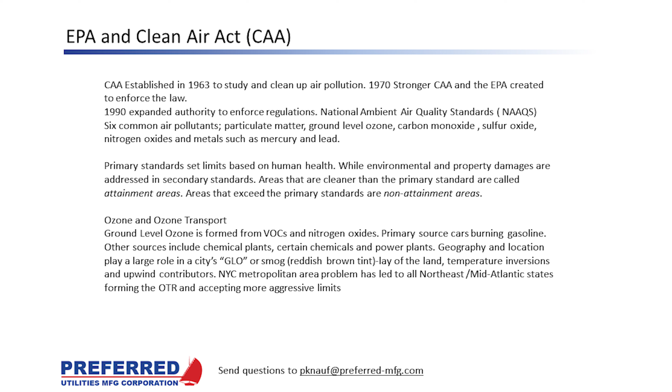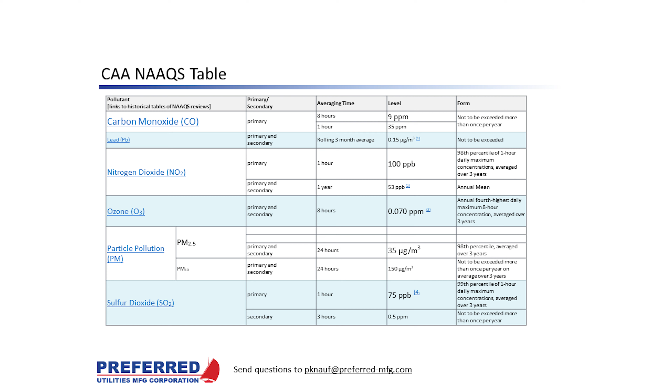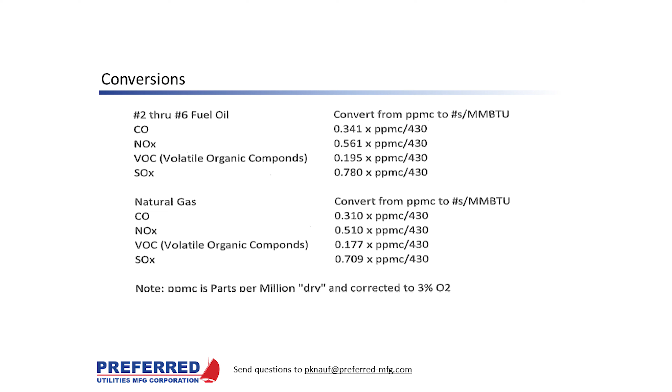If you ever notice a spec or documentation, quite often it's expressed in pounds per million BTU. This is the way you convert from parts per million to pounds per million BTUs for the various fuels, as well as for the chemicals and pollutants we're discussing today. This is a handy chart to print out and save.

Surveys show that the public perception is we are emitting more today and air is getting much worse. Despite this overwhelming perception, the U.S. is doing quite well, and the developing nations are actually contributing to most of the world's pollution.

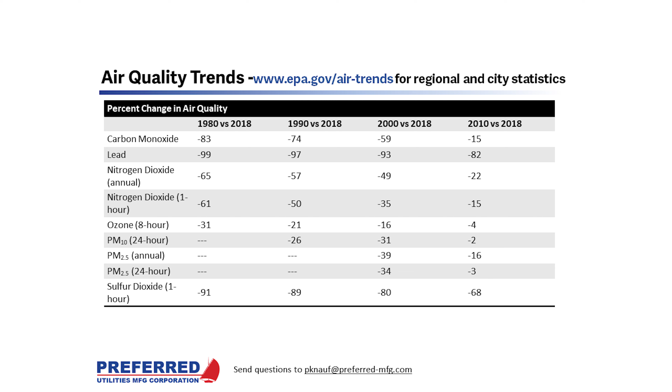They didn't collect particulate matter data back then, not until 2000. Sulfur dioxide emissions are down by 91%.

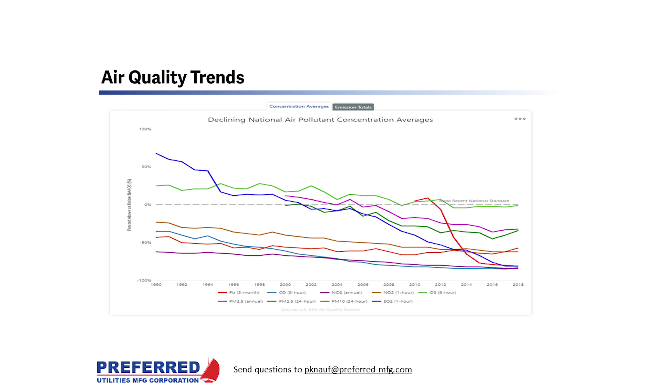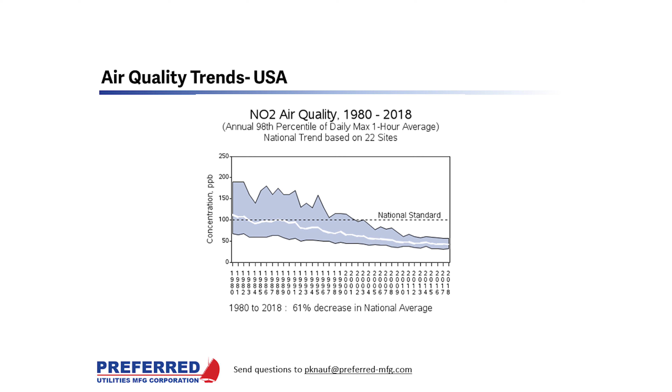The U.S. NO2 air quality from 1980 to 2018: as you can see, we were above what is now the national standard of 100 early on, but by the early 2000s we dropped below that standard, and today we're quite a bit below it. That's measured as daily max 1 hour averages.

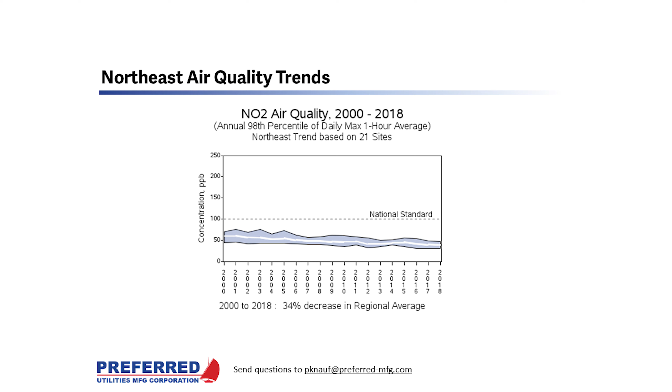There are three main ways to reduce emissions: pre-combustion choices, combustion methods, and post-combustion methods. We're going to discuss those separately.

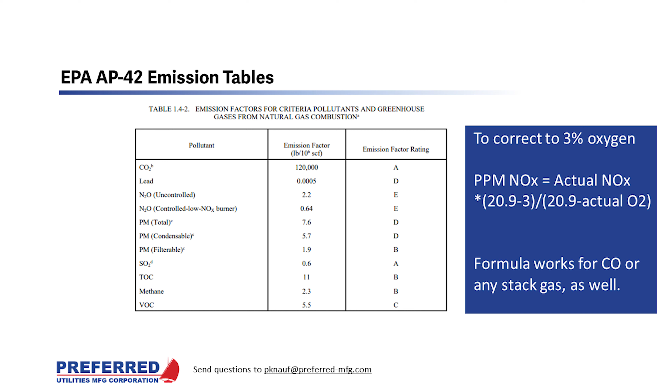It's important to note that combustion has pass-through components. Pollution from sulfur, lead, mercury, and particulate matter are not influenced by combustion technology; they're in the fuel and pass through the combustion process.

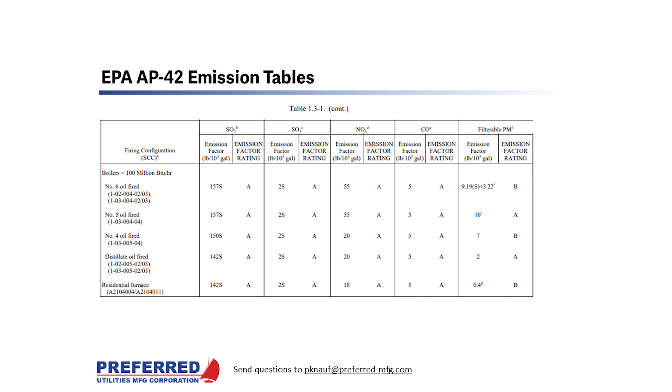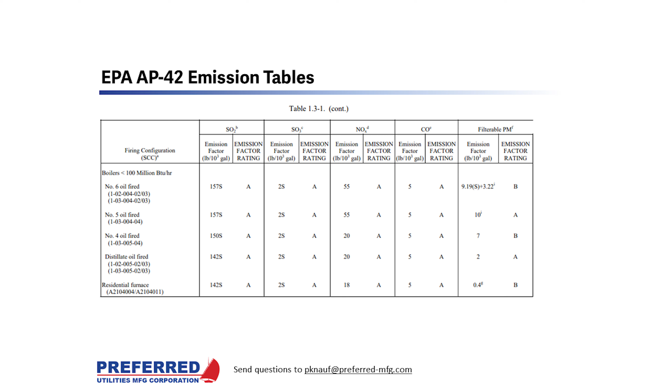Table 1.3.1 shows various fuel oil emissions, expected emissions for SOx, NOx, and CO for different size types of fuel oils. It's important to see the differences in residential furnace emissions compared to the previous slide on natural gas emissions. So far we've discussed pre-combustion techniques to reduce emissions, mainly fuel selection.

Next, we'll talk about operational changes, but I want to take this time to point out the EPA website and the wealth of information available there. Earlier you saw air trends that came right off the EPA website, and recently we saw statistics on fuel characteristics—all this and more information is available at epa.gov.

Next we're going to start talking about operational changes to reduce emissions. Obviously, things like good boiler tuning and lean excess air can improve performance and efficiency in any operation. But mainly we'll be discussing the reduction of pollutants that are not pass-through pollutants, by optimizing combustion and efficiency through improving the combustion process.

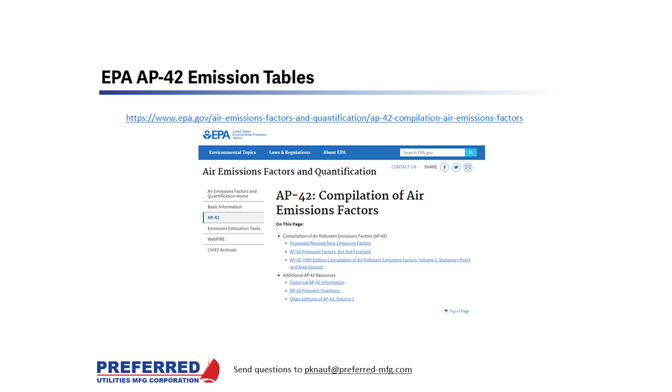Focusing on NOx emissions, NOx is usually 97% nitric oxide and 3% nitrogen dioxide, but it is formed in three distinct ways: fuel NOx, thermal NOx, and prompt NOx. Fuel NOx is oxidation of nitrogen molecules attached to hydrocarbon chains inside the fuel. Thermal NOx is formed by disassociating nitrogen molecules in the air that join with oxygen to form nitric oxide—two distinct different sources for the nitrogen. Finally, prompt NOx is formed from the rapid reaction of atmospheric nitrogen with hydrocarbon radicals.

I wanted to insert here where we've seen pollutants characterized in a few different engineering units. When pollutants are characterized as parts per million, it's important to correct for the oxygen level in the stack, since that influences the statistics. You take the formula shown here: actual NOx times 20.9 minus 3, divided by 20.9 minus your actual measured oxygen. This works for CO as well as any of the other stack pollutants.

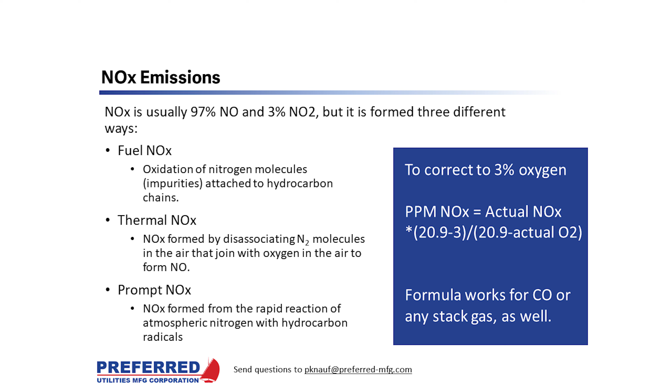Fuel NOx reduction involves oxidation of the fuel-bound nitrogen molecules attached to hydrocarbon chains. For single burner boilers, the only way to reduce it is by burning cleaner fuels. Multiple burner boilers, larger boilers, can use fuel staging techniques to reduce NOx. The strategy is to convert the hydrocarbon fuel to carbon monoxide in a sub-stoichiometric or fuel-rich environment, then convert the CO to CO2 and water vapor in a high excess air environment.

This can be done in utility boilers through burner tuning, over-fire air ports, and putting some burners out of service. Obviously, these methods are not available in a single burner boiler or furnace, and the only way to achieve that reduction is by changing the fuel.

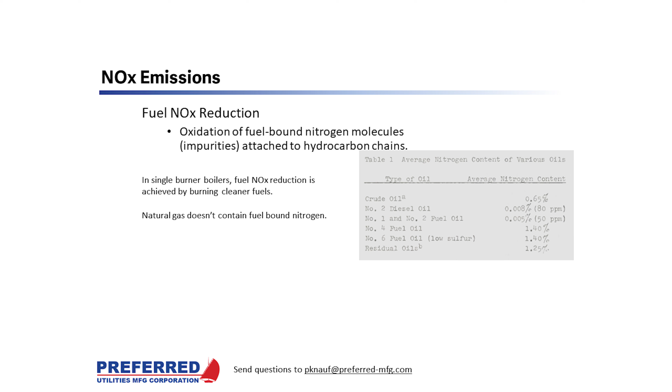Thermal NOx reduction. The disassociation of nitrogen molecules in combustion air follows an Arrhenius relationship, meaning the percentage of nitrogen molecules broken into nitrogen ions has a logarithmic relationship to temperature. So to reduce thermal NOx, combustion engineers reduce the peak temperature of the flame.

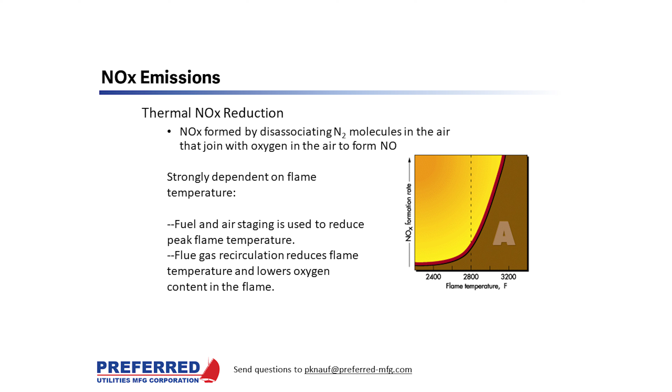This is done with burner fuel and air staging to slow combustion, and flue gas recirculation that spreads the enthalpy of combustion over a higher mass flow denominator and lowers the oxygen content at the flame, so more nitrogen radicals reform with other nitrogen radicals to make diatomic nitrogen again. Reducing the concentration of oxygen in the combustion zone, increasing the concentration of nitrogen, reducing the peak combustion temperature, and reducing the time combustion gases remain at elevated temperature will reduce thermal NOx formation.

FIR is a NOx reduction technique applicable to boilers that burn gaseous fuels only. It is similar to FGR, except that a portion of the flue gas is mixed with the fuel instead of the combustion air. Use of this technique has several advantages: it lowers the peak flame temperature, reduces the oxygen concentration in the combustion zone, improves the fuel-air mixing, and reduces the time under NOx formation conditions.

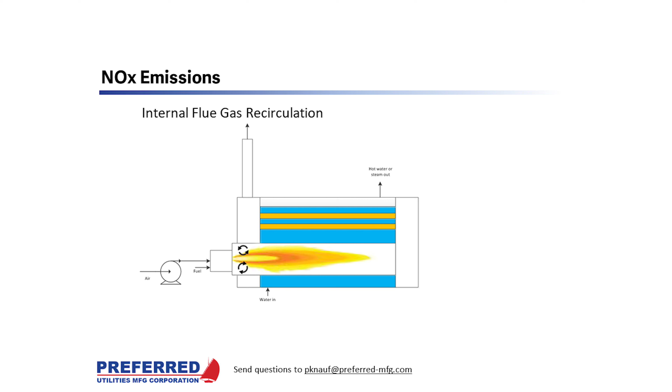When the same volume of flue gas is used, FIR can be more effective at reducing NOx than FGR. To minimize possible confusion, caution should be exercised when the acronym FIR is encountered, because it is used to represent both fuel-induced recirculation and forced internal recirculation.

This schematic shows external flue gas recirculation, which accomplishes the same type of thing by reducing the combustion temperature.

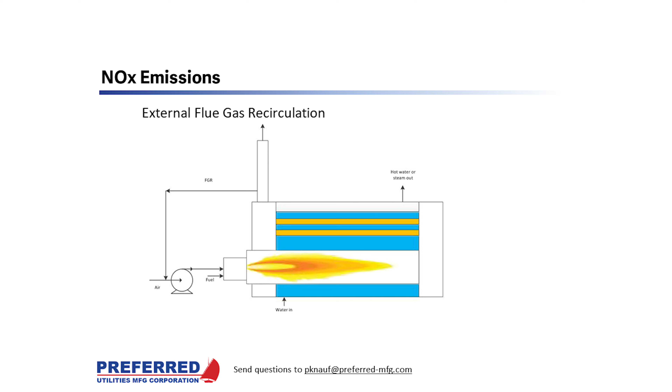It is just the external feeding of the flue gas from the stack or the last pass of the boiler back into the combustion air, where it mixes in the fan or the wind box and is reintroduced into the furnace. It is very effective against thermal NOx formation, but this technology is a little bit older, and it goes back to the 1980s.

Prompt NOx. The most effective NOx emission control strategy is one in which NOx formation is reduced as much as possible and boiler performance is affected as little as possible. Except in advanced burner concepts where air and fuel are premixed, combustion at either low or very high excess air levels results in low NOx formation. For most low NOx boilers, the best combination of low NOx formation and high boiler efficiency occurs when the amount of oxygen is just enough to ensure complete combustion.

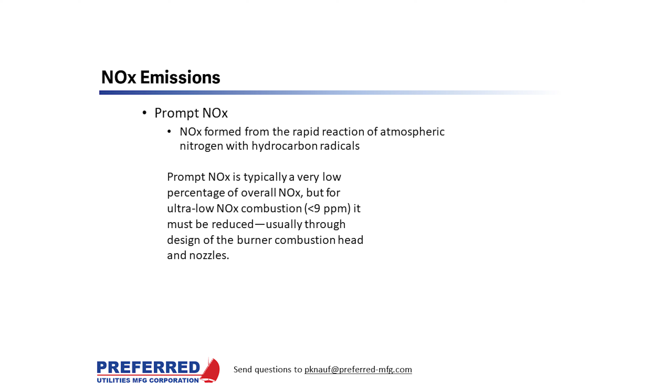Operation at very low excess air levels can cause problems. It can result in incomplete combustion and the formation of CO that causes boiler efficiency to decrease. In addition, it can create unsafe conditions inside the boiler that can lead to an explosion.

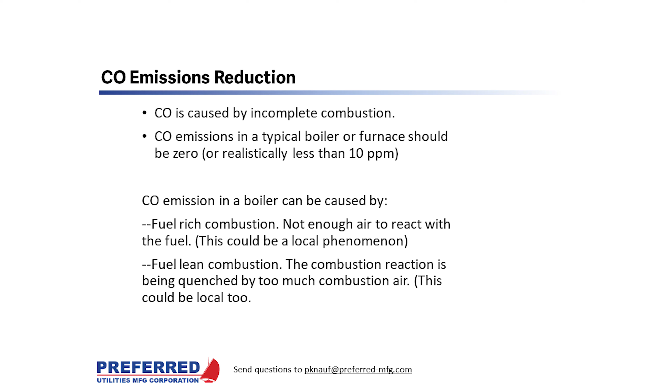CO emissions reduction. CO is caused by incomplete combustion. CO emissions in a typical boiler or furnace are realistically always less than 10 parts per million. CO emissions are caused by fuel-rich combustion, not enough air to mix with the fuel, and too lean a combustion where there's too much combustion air. It can also be caused by flame impingement on the tubes, the furnace wall, or cool refractory. The flame could be too small, so it's not getting above the critical 1400 degrees Fahrenheit.

It is much more common to have CO emissions at low fire than at high fire.

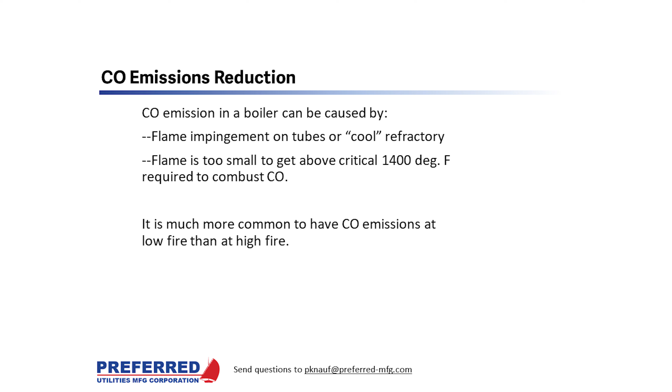So, in summary, we've got NOx abatement methods. Fuel NOx: use a cleaner fuel. Thermal NOx: reduce your peak flame temperature. And prompt NOx: improve mixing and eliminate rich zones.

And post-combustion treatment, which we're not going to discuss today, but just so you know, it's also available on the EPA website—SCR, catalyst beds, and chemical injections—and that area is really developing quite rapidly in the last few years.

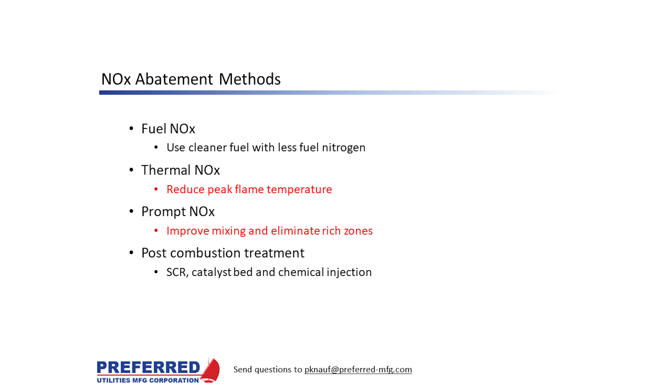Okay, so I'm Dave Oaf. I'm the sales manager at Preferred Utilities. I have been a burner combustion engineer since the early 1990s, and I actually worked in Southern California where low NOx technology really started with Rule 1146, which mandated that if your boiler didn't have a low NOx burner on it, you had to trash it and install a low NOx burner. So we were very busy retrofitting boilers to low NOx burners in the early 90s. And as those slides from Peter show, we've done a very effective job at reducing NOx emissions in the United States.

So much so that when fossils like Peter and I talk about emissions, we assume we're talking about NOx, CO, and SO2. It seems like anybody under 30 doesn't know what air pollution really is in the United States. So when you talk to them about emissions, they immediately start thinking about CO2. And CO2 is what we're going to talk about now, and how you can reduce CO2 emissions in the boiler.

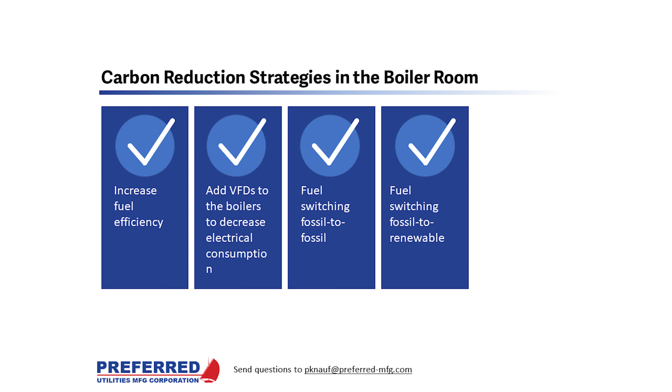We're going to start small and end big, beginning with fuel efficiency improvements you can make in the boiler room. It stands to reason that if you burn less fuel, you're going to release less carbon. We've been using various technologies over the last 30 or 40 years, as fuel prices have increased, to increase the efficiency of burners for the economic payback. But by decreasing the amount of fuel you burn, you also decrease the amount of CO2.

So what you can do is retrofit to a high performance burner that will lower excess air, increase burner turn down, and if you employ a control system known as oxygen trim, you can lower your real world excess air, or your operating excess air, even further. Efficiency gains of 5 to 8% of fuel consumption are possible, and that corresponds to 5 to 8% carbon emission reduction.

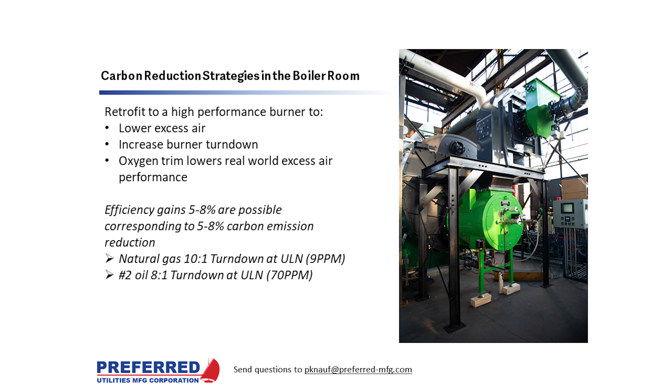Another thing you can do is reduce the amount of electricity you're consuming in your boiler room. We do this by replacing across-the-line motor starters with variable speed drives. Usually we start with the biggest blowers or motors in the boiler room, and that's usually the forced draft fans on the burners. We might put VFDs on the induced draft fans, and sometimes on the feed water pumps. But typically we start at the largest motor because that's where the ROI is the most, and that's the FD fan. The conversion between electricity and CO2 depends on where you are.

The way to calculate this is to go to the EPA's website. They have a calculator there called AVERT, which is an acronym for something or other. The national average is you reduce 7.07 times 10 to the negative fourth tons of CO2 per kilowatt hour reduced. That number varies from place to place depending upon how much fossil fuel is used to create electricity where you live.

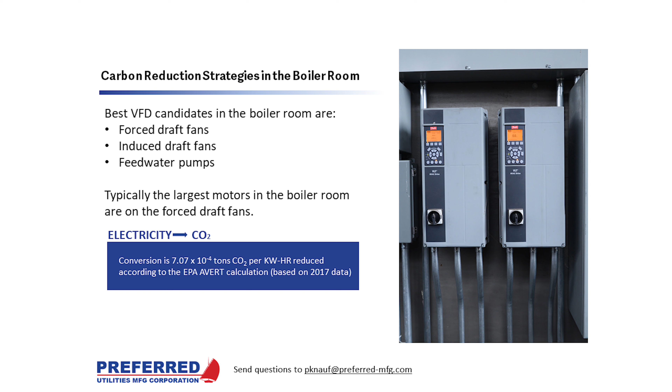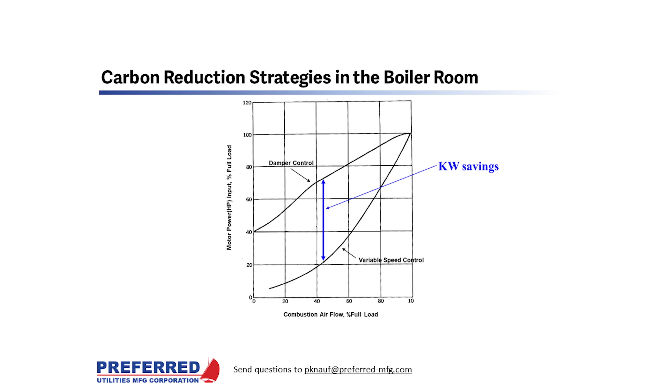This is the equation you use to calculate electrical savings for different VFD speeds: 1 minus your actual speed divided by 60, all to the third power. So if you run the FD fan VFD at 30 hertz, your electrical savings is 87.5%. At 20 hertz, the electrical savings goes to 96.3%. So there's a lot of electrical savings to be had by slowing down your fans. The conversion, as a reminder, is 7.07 times 10 to the negative fourth tons of CO2 per kilowatt hour reduced.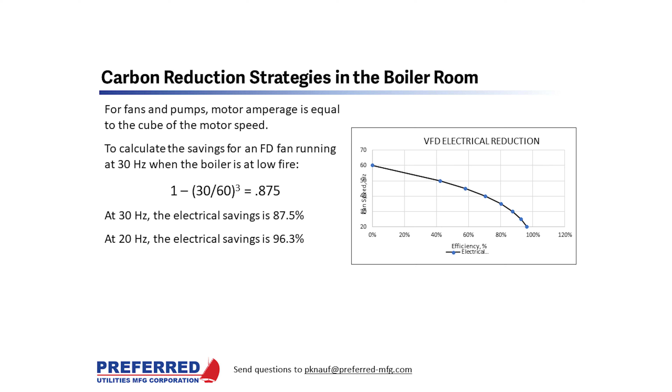To estimate the fuel and electricity efficiency gains possible with a burner and controls retrofit, you can use Preferred's online energy saver payback tool. You input the excess air, stack temperature, and load profile of your existing burner, as well as the performance of the proposed new burner, and the web app estimates your fuel, electricity, and carbon savings. You can input your fuel, electricity, and retrofit costs, and the web app will output an ROI for the upgrade.

The web app doesn't calculate CO2 savings from the electricity reduction yet, but it's on our list of things for our programmers to do. For now, you can use the AVERT calculation for your region.

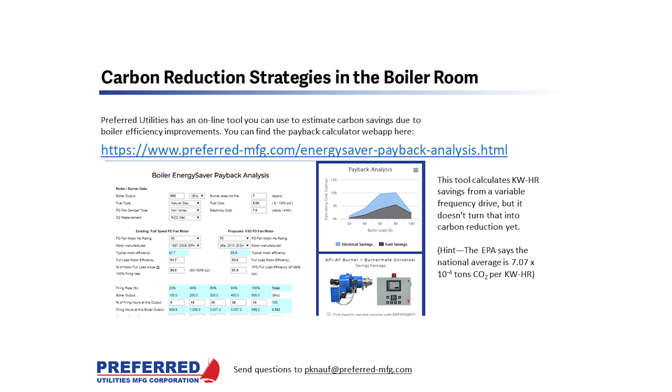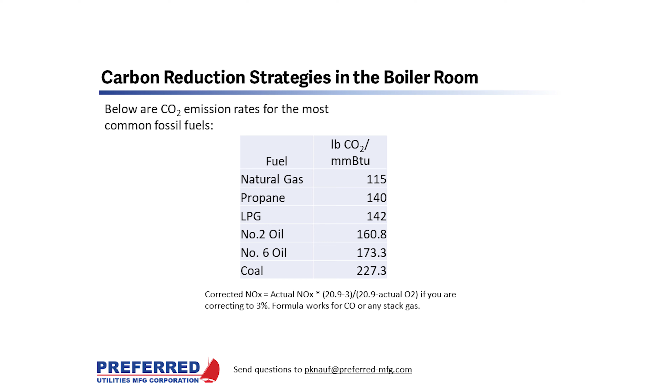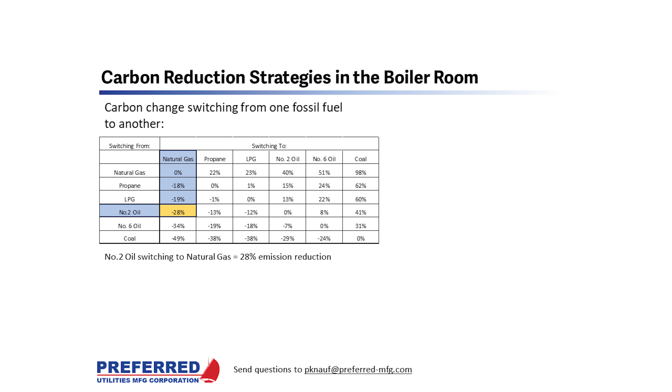All central steam plant boilers can be converted to natural gas firing, including field-erected water tube boilers, packaged water tube boilers, and packaged fire tube boilers. In most cases, new burners and controls will be required.

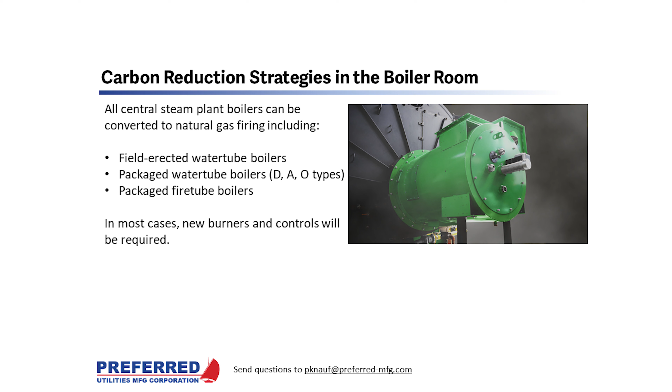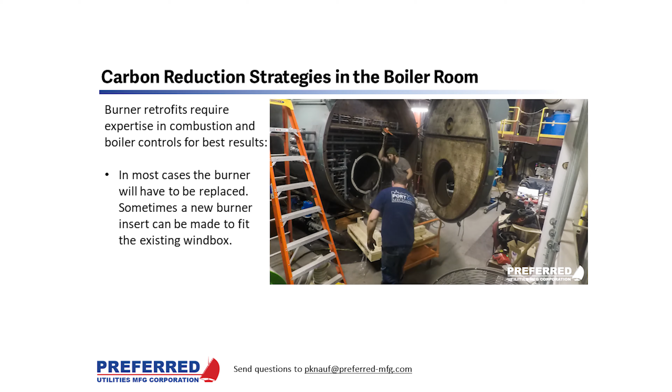Burner retrofits require expertise in combustion and boiler controls for best results. In most cases, the burner will have to be replaced, though sometimes a new burner insert can be made to fit into the existing wind box.

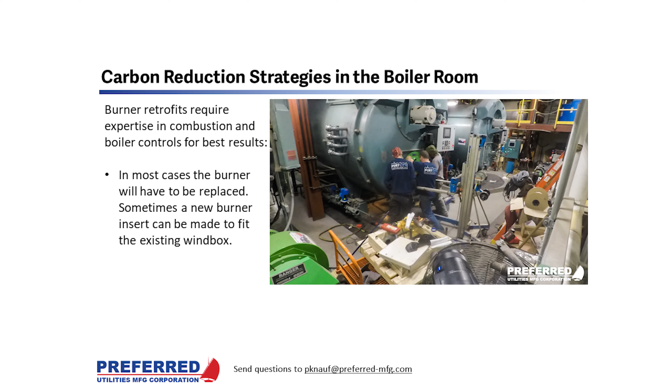This video shows a crew replacing the burner in a trademarked Cleaver Brooks boiler with a new preferred burner. As you can see, with guys working really fast, this was done in 41 seconds.

This was a fuel switching project at Bates College where they switched to a renewable fuel and achieved an 82% carbon emissions reduction, but I'm skipping ahead.

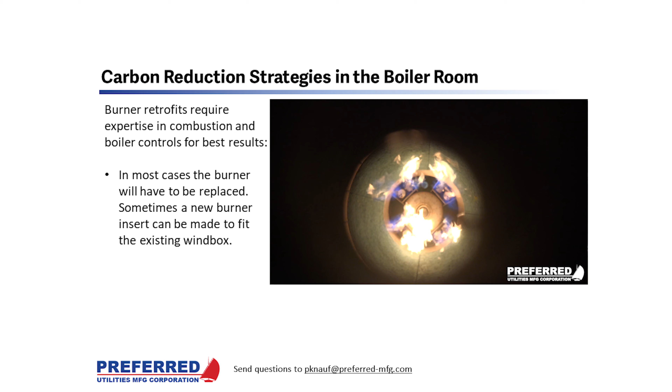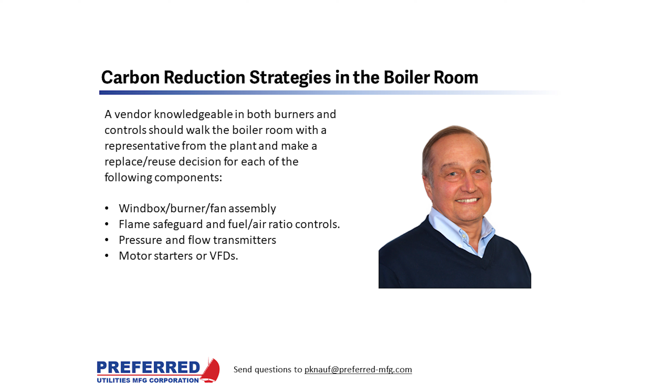When you're doing a burner retrofit, it's important to include a vendor knowledgeable in both burners and controls who will walk the boiler room with a representative from the plant and make a replace-or-reuse decision for each of the following components: the windbox burner fan assembly, the flame safeguard fuel air ratio controls, instrumentation including pressure and flow transmitters, motor starters, and VFDs. Why spend money replacing perfectly good equipment if it will work with the new burner?

The final carbon reduction strategy we're going to talk about is converting from a fossil fuel to a renewable fuel. The idea with renewable fuels is we are taking carbon that was already in the biosphere and burning it, not taking carbon that was 8,000 feet under the ground in the form of fossil fuels and putting that into the atmosphere. So when we talk about landfill gas or digester gas, or some of the liquid fuels coming up in a few slides, this is carbon that was recently trapped and we're putting it back into the atmosphere, not long cycle carbon from the dinosaur period.

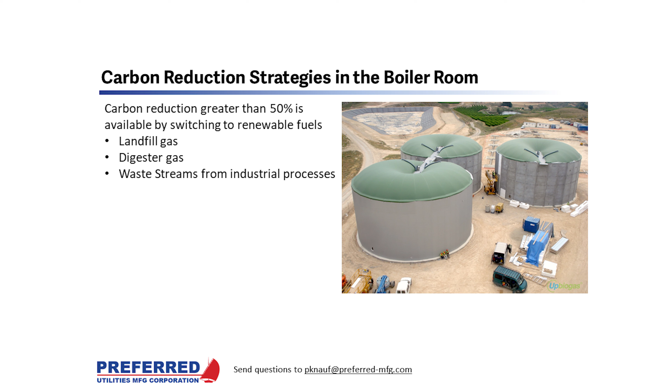Everybody in the boiler burner industry is familiar with landfill gas and digester gas. Both are renewable fuels made from renewable sources, and we've been burning these fuels since at least the 1980s. The problem is they're gaseous fuels that can't be economically transported any distance. Even if you had the real estate to put in a lagoon or digester gas in the middle of your campus, you're not going to want to do it because of the smell.

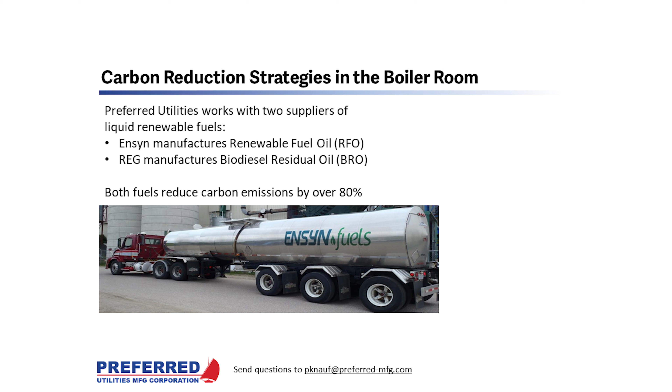Preferred works with two suppliers of liquid fuels. Ensyn manufactures a fuel called Renewable Fuel Oil, or RFO, and REG manufactures a fuel called Biodiesel Residual Oil. Both of these fuels are liquids, so they can be put on a truck or a rail car and delivered directly to your facility from where they're made. This unphotoshopped picture is proof.

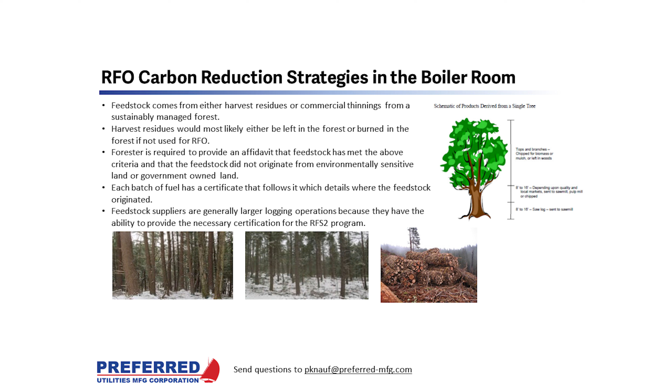Ensyn makes renewable fuel oil, or RFO for short. It's made from tree trimmings from harvest residues or commercial tree plantation thinnings. If this biomass wasn't made into RFO, it would be burned or left to decompose and the CO2 would have hit the atmosphere soon anyway. RFO has been approved for all regulatory credits for renewable fuel oils, including RINs and RECs. This is a very simple diagram explaining where RFO comes from.

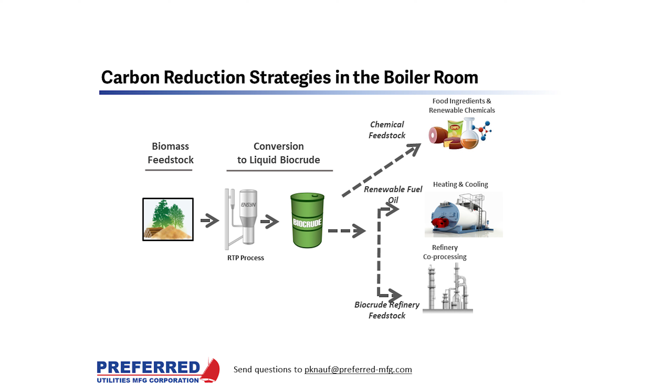The end products are liquid smoke, renewable feedstock sold to petroleum refineries, and RFO for steam and hot water plants. By the way, when you burn RFO in your boiler, it produces a very nice wood smoke aroma. RFO is considered biogenic, so greenhouse gas emissions from RFO are about 88% lower than number 2 oil and 82% lower than natural gas.

Virtually any fire tube or water tube boiler can be converted to fire RFO. RFO is acidic, so everything in contact must be made out of stainless steel. The greenhouse gas emissions reductions for this fuel are not 100%, because it does take some fossil fuel to make the renewable fuel and to transport it to the plant where it's going to be burned.

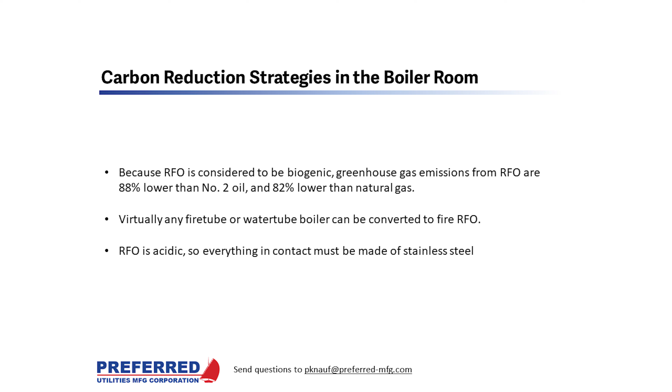Ensyn, the manufacturer of RFO, typically amortizes the cost of the fuel conversion in a 5-year fuel contract. Even with the fuel switching costs, the price of RFO is close to the price of natural gas on a comparable BTU basis.

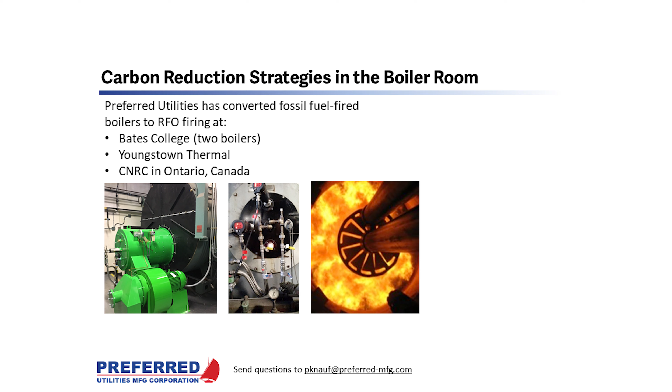Preferred has converted boilers at 3 facilities to RFO: Bates College, Youngstown Thermal, and a CNRC facility in Ontario, Canada. The video I showed you earlier was Bates College. They've converted 2 of their central steam plant boilers to RFO. As soon as our technicians finished tuning up the new burners, Bates issued a press release touting their success reducing greenhouse gas emissions at their campus.

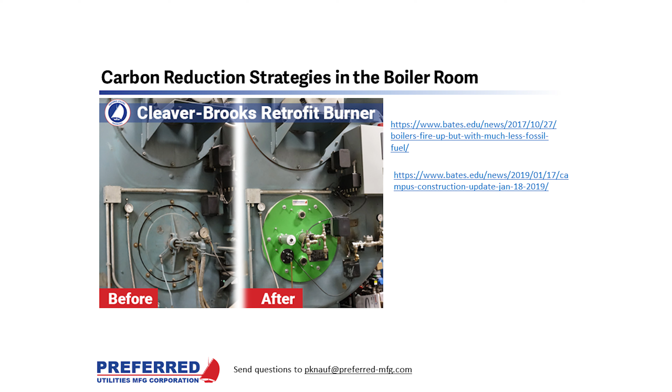The URLs are there, or you can Google the words Bates and renewable and you'll find these articles. Actually, last summer, Bates announced that they are greenhouse gas or carbon neutral, mainly because of efficiency improvements to the campus and converting their central steam plant over to RFO.

Preferred is also working with REG, the nation's largest supplier of biodiesel. They make a fuel called Biodiesel Residual Oil. Think of bioresidual oil as the number 6 oil of biodiesel. It has the appearance of dirty French fry oil, but it has actually undergone extensive cleaning to remove impurities such as ash, heavy metals, and water.

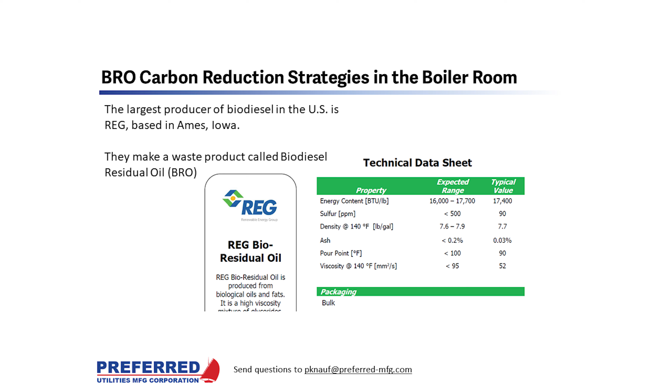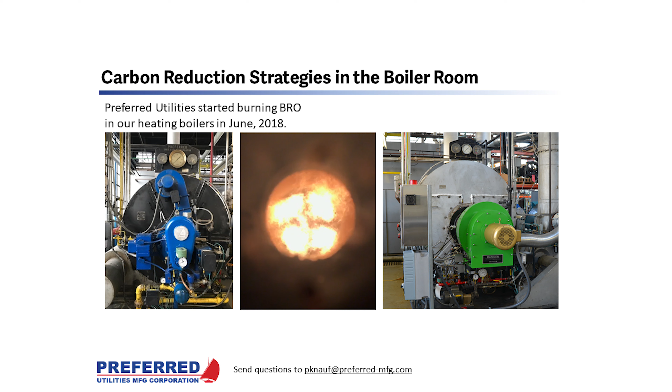Preferred started burning bioresidual oil in our 2 shop boilers in June 2 years ago. The burner on the left is a 1950s vintage Preferred rotary cup burner designed to fire number 6 oil. The burner on the right is our state-of-the-art low emissions Ranger burner. They are both burning bioresidual oil.

This is the startup data from one of the 2 boilers. Important things to note include bioresidual oil needs to be heated to 160 to 165 degrees F. If the existing burners that you're trying to burn bioresidual oil in are already using number 6 or number 4 oil, they will have a pump and heater set that could be reused.

Note, the combustion efficiency is similar to number 2 oil. Stack CO is less than 10 parts per million. This is considered clean combustion for any fuel. Opacity was 0 throughout the boiler load. In fact, these burners were firing number 6 oil before we changed them out to bioresidual oil. It took no new equipment, not even a new oil tip, to burn the bioresidual oil.

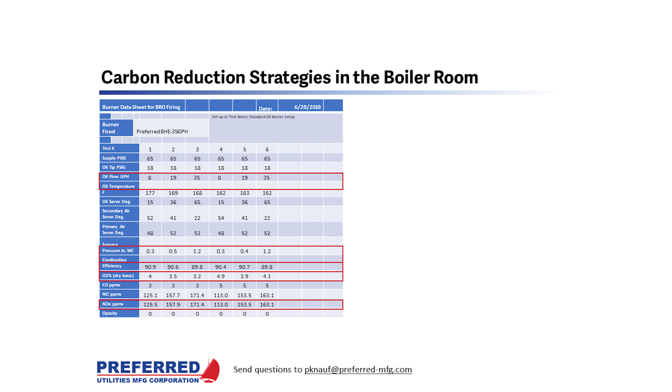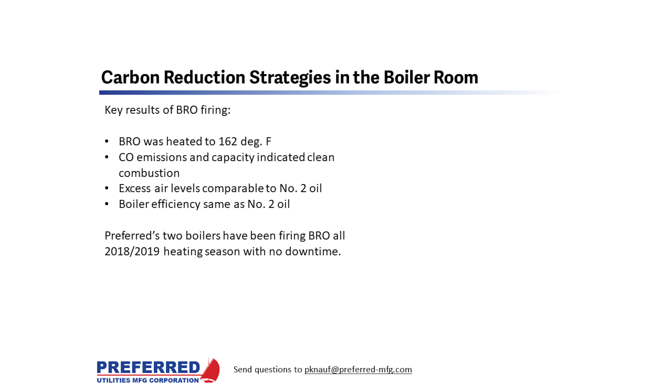Preferred's 2 boilers have been firing bioresidual oil all through the 2018-2019 heating season and the most recent 2019-2020 heating season with no unplanned downtime. We shut down these boilers each summer, we open them up, and we've found no unusual ash or sooting of the boilers. We fired them up again last summer for a show and tell with no issues at all.

The price of bioresidual oil is generally less than number 2 fuel oil. Fuel switching costs vary widely depending on the existing combustion equipment. So the ideal bioresidual oil candidate is a facility that already has a pump and heater set, already firing number 6 or number 4 oil. They can reduce their greenhouse emissions by up to 80% and spend less for fuel than number 2 oil.

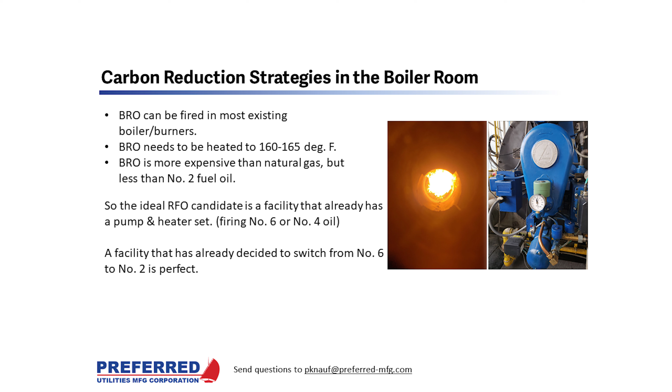There are a lot of facilities in the Northeast that are still burning number 6 and are planning to switch to number 2 in the near future. These plants can switch to RFO or bioresidual oil and exceed all existing and proposed carbon emission reduction goals. So that's my part for reducing carbon emission in your boiler room.